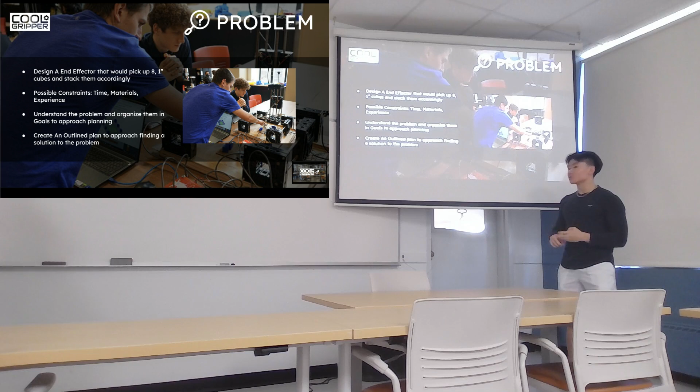So understanding this problem, we have to figure out a solution. Our solution first was understanding what we need to do, how we meet our constraints, and how we can establish a plan according to those constraints. So our plan was to make sure we take into account our time constraint, our limited materials, our overall experiences, and the ability of the CNC machine.

We also have to adhere to each member's skill sets as we introduced ourselves in the beginning. Sully, Ashton, Michael, and Will, everybody has their own talents. We have to adhere to them and maximize them during this project.

We designed our plan based off of the engineering design process, making sure that we satisfy research, making sure we satisfy some time brainstorming, and making sure we have extra time so that if there is any failure, we can still come back and revise our project. We also have to have everything organized out, making sure we're timely and meeting our time constraint, our due date, and our deadline.

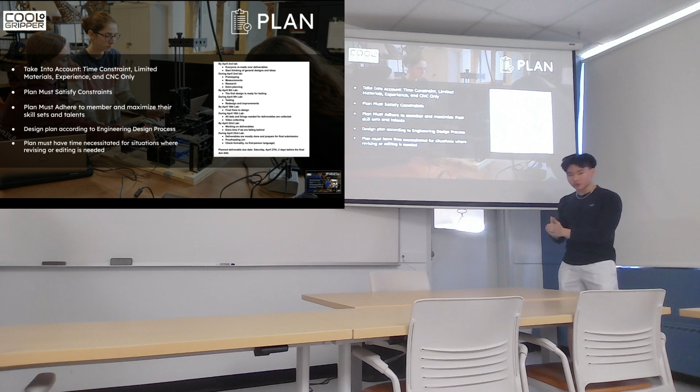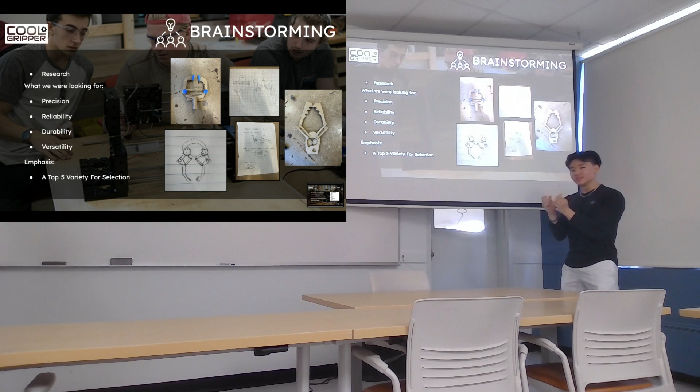So for our solutions, our main focus was making sure we understood what we were looking for. We had to research different designs and take different elements and add them together in our own way. We tried to focus on making sure we had 5 different grippers that we could select from when making the decision on which one's the best gripper. What we were mainly looking for was precision, reliability, versatility, and durability, making sure it is one whole piece and doesn't fall apart as the CNC machine is moving.

For our constraints in general, we had a constraint of 1 month, 4 weeks, or 4 lab periods per week. We also didn't have a large selection of materials to choose from, which consisted of acrylic, cardboard, and wood. We also had problems with the CNC machines themselves because they either did not work or were very old, and we could only use them about 3 times per lab. We also lacked experience, so during those 4 weeks we had to learn on the go, and we also had the constraint of our servo motor not being strong enough to turn our gripper, and it had a lack of range of motion.

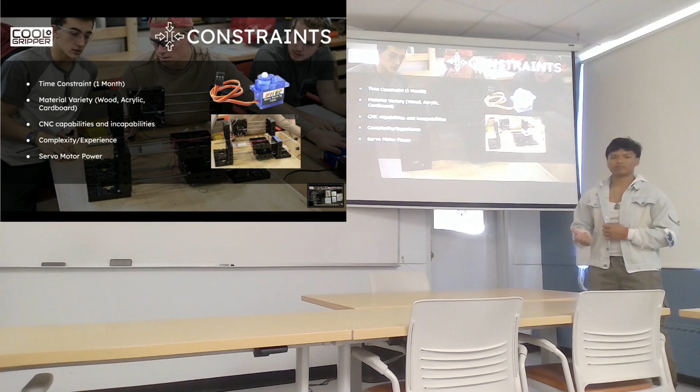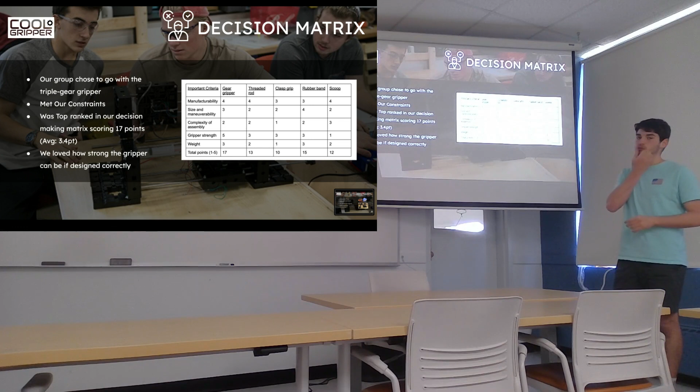So this is how our group decided which type of gripper we wanted to go with for our project. We had a list of qualities that were crucial to our decision, such as manufacturability, size, maneuverability, complexity of assembly, gripper strength, and weight. We weighed each gripper on a scale of 1 to 5, and the gear gripper came out on top with an average of 3.4 per quality. We loved how strong the gripper was and its mobility and strength to pick up the block and accurately move it and place it in another spot.

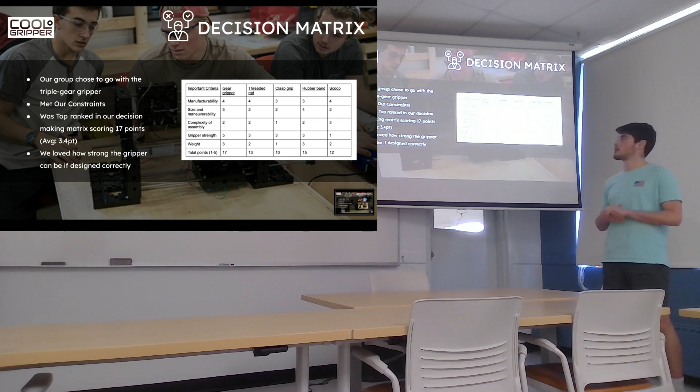So that's how our group ended up choosing the triple gear gripper. For the gripper, on our previous slide, we said that we picked the 3-gear gripper. We did research on different kinds of grippers, and we thought that this one would be the best.

So we did more research on how to do the gears and how to actually put it together in SolidWorks. We came up with 2 grippers on each side, and 3 gears - these 2 big ones and that small one. Then we had 6 pins, 2 on top, 4 on the bottom, and 2 base plates stacked on top of each other to give it more density.

We had a metal bracket which we didn't end up using, we just put it on the CNC machine. Same thing with the stability bracket. The motor wasn't really strong enough since we had too heavy of a gripper, but we were able to kind of make it work.

Besides that, we just attached that onto that black gear right there, and everything worked out good. The design worked pretty good.

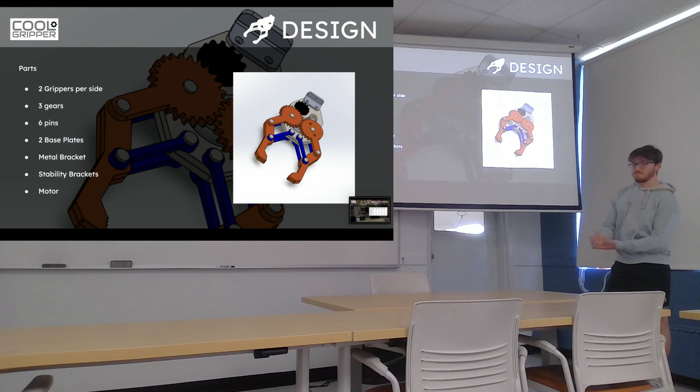One of our problems was our code wasn't working properly, so we needed time to refine and develop the code in the right way. Our second issue was our SolidWorks design - we had many issues with the way it was reading through Adobe and laser cutting. However, at the end of it, we were able to work together, delegate the work properly, and overcome all of the challenges we were faced with.

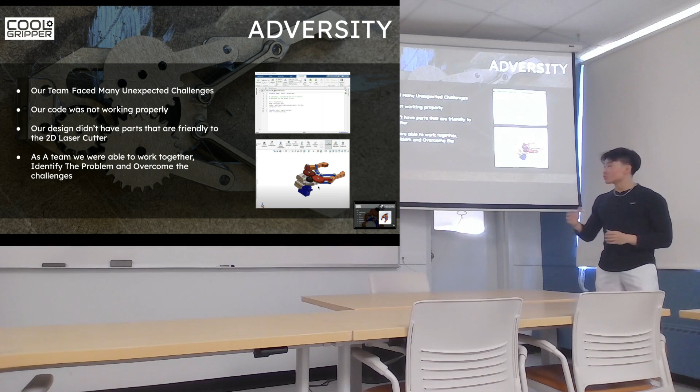The biggest problems with our code was that we spent about 2 labs with a malfunctioning CNC machine, where our code would basically replay the same code and a different set of functions would happen. Because of this, we spent a lot of time going over our code and trying to manually change it in order for it to work. Eventually it would work sometimes, but it just wasn't reliable.

So we came to the solution that we just had to switch to a new CNC machine that worked. Because the machines are old, there were a lot of wiring issues where they weren't really working well, and the servo motors got extremely hot, leading to the shrink wrap to come off mid-set, causing a major setback. We had to let it cool down.

Another problem was that we had to manually reset the CNC machine with our hands, turning it hundreds of times to get back to the origin and reset our code. Once we switched to a new CNC machine, the coordinates were off - I don't know why, but we had to fix that issue. In order to pick up the block, we had to reset the coordinates where we wanted to go and find a new place to pick it up.

Okay, so for another problem, we had some issues with SolidWorks. One big problem we had at the beginning was creating the actual gripper in SolidWorks - we had a lot of trouble with it being okay with what we were doing, whether the sides were correct. It would tell us many times something was off, so we had to redesign it in order for SolidWorks to accept the design we wanted.

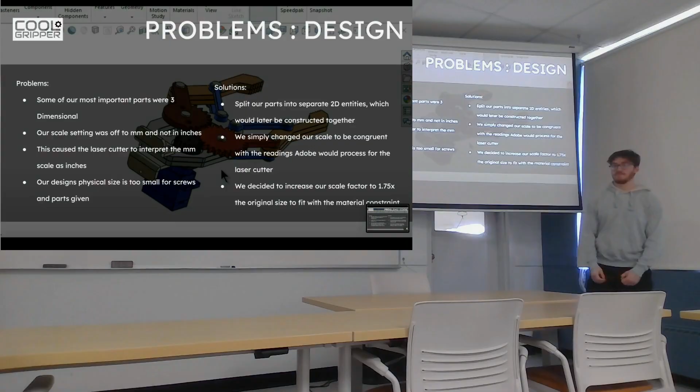So right here we have our initial prototype and our final prototype. We don't want to spoil the final prototype just yet, but our initial prototype was made out of cardboard. We wanted to make sure the dimensions were correct for the materials we were given. One of the material constraints we had was our screws were either too big or too small, and we wanted to make sure we met that constraint.

We understood that this prototype was too small, and at the end we had to scale it up by 1.75 times the original size. Now here is our final design, as I'll show in the video right here.

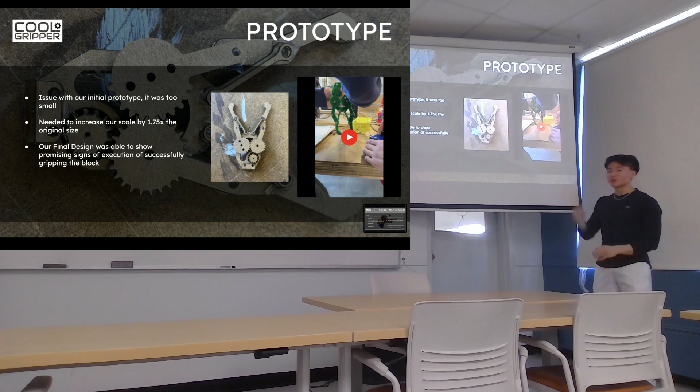As you can see, our final gripper design was very promising. We loved the way it looked, we loved the strength of it. We even added paper mache and sandpaper grippers at the end of it to make sure the block would frictionally be picked up. Overall, from our initial point to our final point, we are very satisfied with the way it ended up.

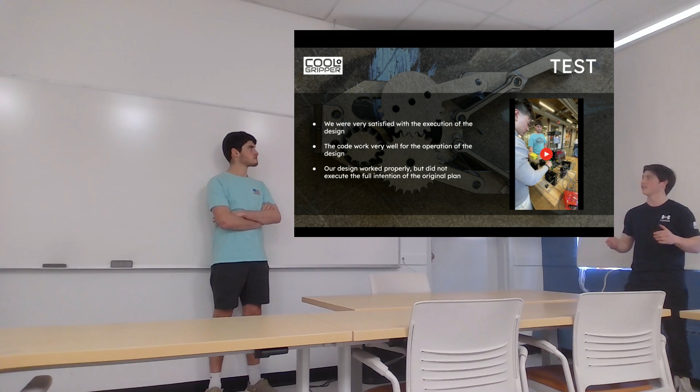So using our prototype, we began to run the final test. The code worked very well for the operation of the design, so we were pretty happy. As we switched to the CNC machine, the code worked. We solved those problems and were able to move the CNC over to the block, move it down, pick it up, and move it back to the origin to place it back down. We'll cut to a video of that right here.

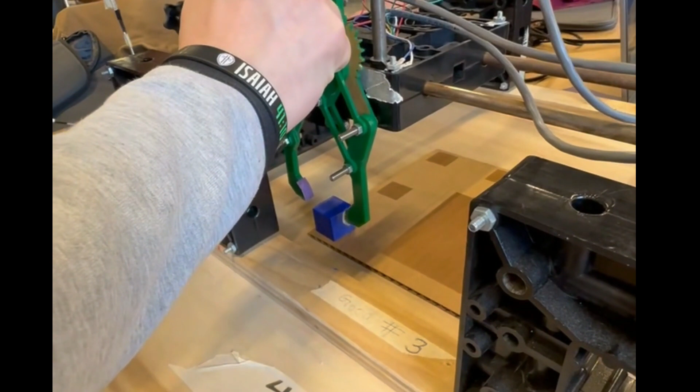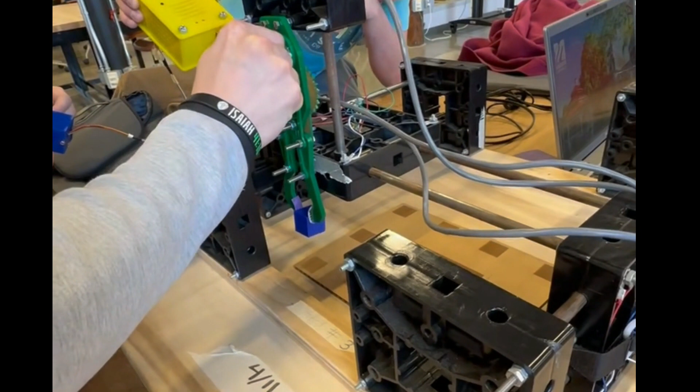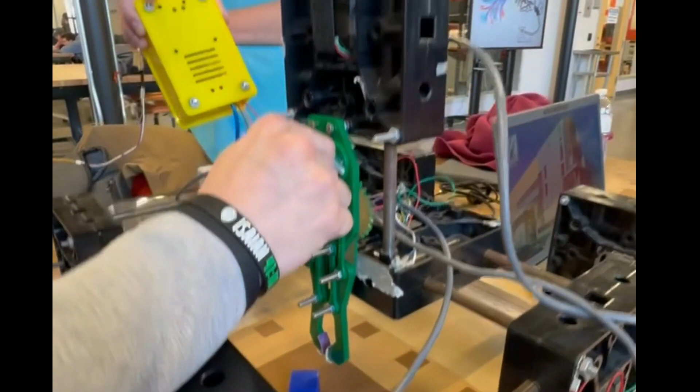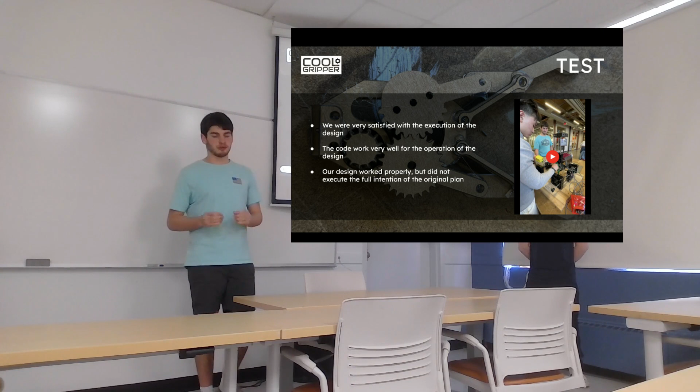As you can see, our design works. It could not complete all the orders as provided, but the full intention was still there. We were satisfied, and we were happy with the end product.

As you can see here, my buddy Sully is very happy about our first prototype. Considering how happy we were about our first prototype, guess what? We're very, very satisfied with our final prototype.

However, of course, we weren't able to execute the full 8 cubes, but we did learn that the engineering design process is not perfect and there's always room for improvement. We are very content with it, and we learned that our constraints weren't as effective as we'd hoped. Overall, if our constraints weren't a factor in our design process, we'd be much further along, considering some of our 3D printed parts were an issue. If we had the chance to 3D print those parts properly, we would be in a much better position.

But overall, we learned a lot during this process.